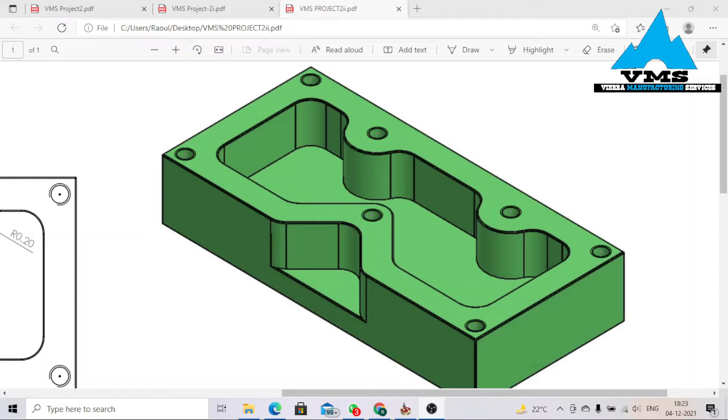Guys, in this tutorial we are going to be designing the VMS project 2. It's an exciting project. In this project we are going to be learning about many things, especially when it comes to the generation of the M and G codes. So let's get started. So let me just show you guys a drawing. Okay, so this is the final page. So we have page 1, page 2 and page 3. So let's get started.

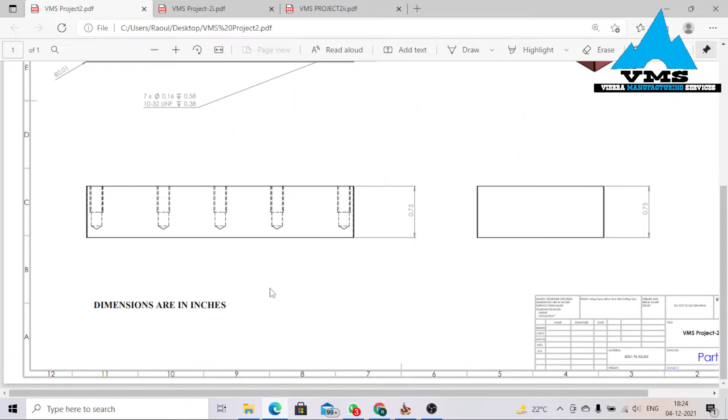Okay, let me just put this down. Let me open the software. File, new, part. Okay, good. So firstly guys, one thing to note is dimensions are in inches. Secondly, we have a rectangle of length 3.98 inch and a width of 1.88, with an extrusion of 0.75. So 3.98 and 1.88. Okay, let's get started.

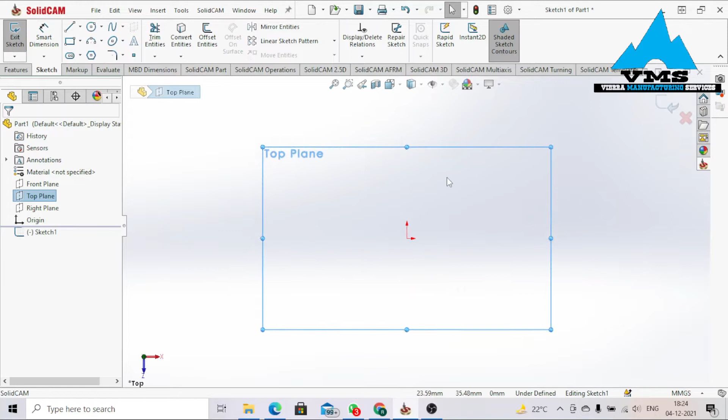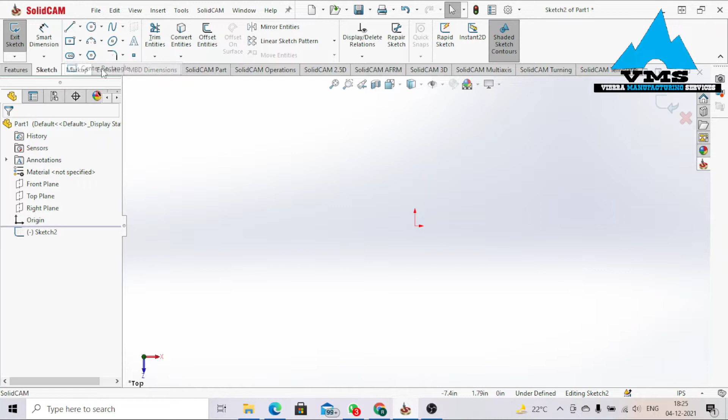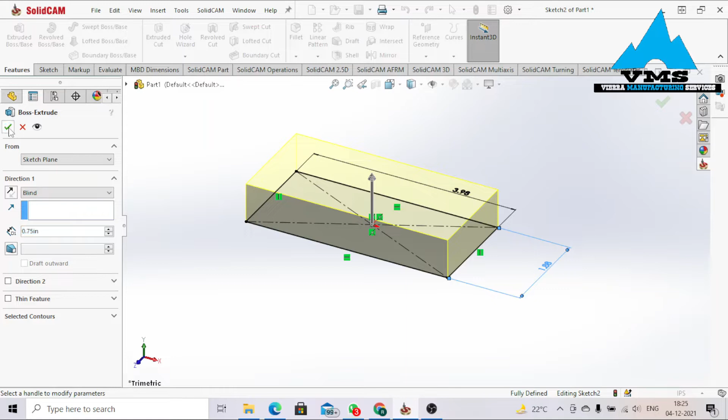Top view. Center rectangle. Smart dimension, 3.98. Oh, sorry, mistake. Always make sure to check the unit first. Unit in inches. Okay, sketch, top view, center rectangle. Smart dimension. Sorry for that mistake. 3.98, and 1.88. With an extrusion of 0.75. Okay, all good. So let's check what's next.

Looking at the drawing, we have fillets. We are going to be putting fillets later on. So let's just focus on these holes. We have about 7 holes: 1, 2, 3, 4, 5, 6, 7. It's even indicated here. From here to here, vertical. I'll put this hole, this hole, this hole, and this one, and I'm gonna make all the others.

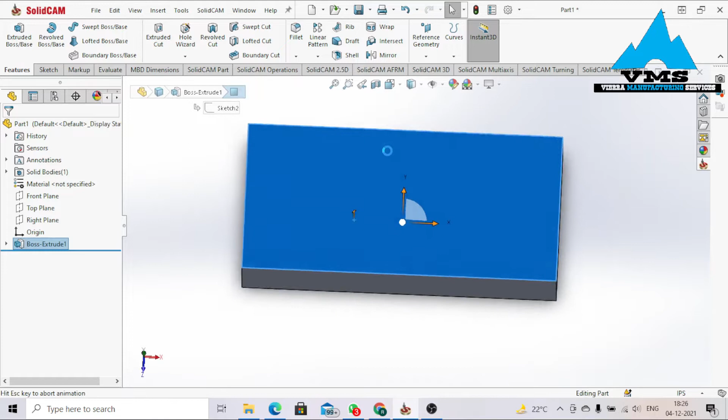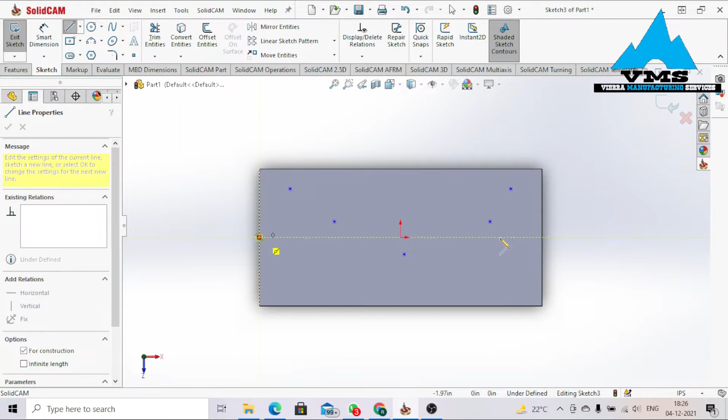Okay, sketch. Just click on point over here. Let's display some holes. Somewhere here. So let me just put center lines. Making sure, just click on this, pressing Ctrl, and then click on this. It should be horizontal. Same process. Left click on this, press Ctrl, and then left click on this. Horizontal.

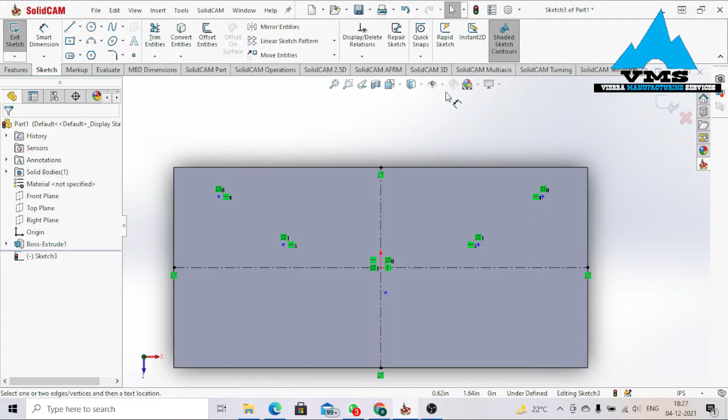Just press this, and again, hold Ctrl, click on this, and then click on this center line and make symmetry. Similar for this. Symmetry. Let's check the length. From this point to this point, we have 3.7, and its width is about 0.15. Smart dimension from here to here, 3.75.

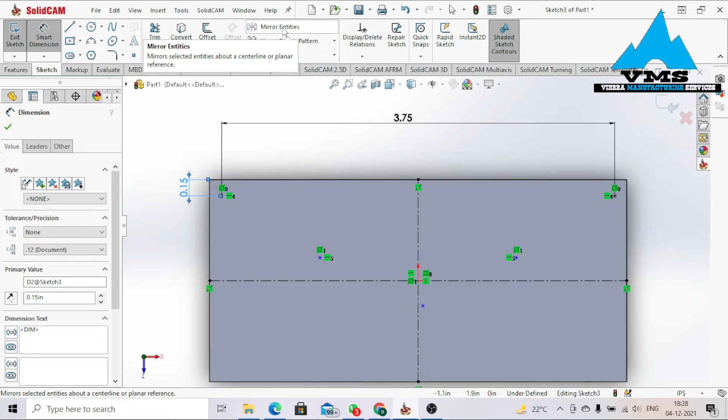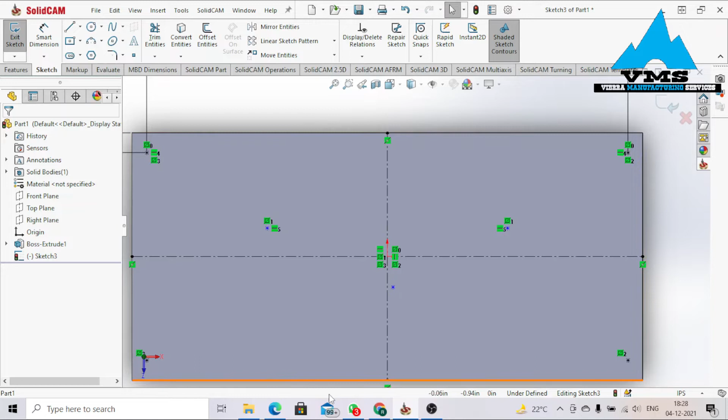One thing I'm gonna do is use mirror entity, selecting this point and this point, and mirror about the x-axis. As you notice, the sketch is not fully defined, because this and this are not defined. We need the distance from here to here. This distance is 3.7, so we have to edit it. The distance from here to here is 1.7, and its width is 0.3.

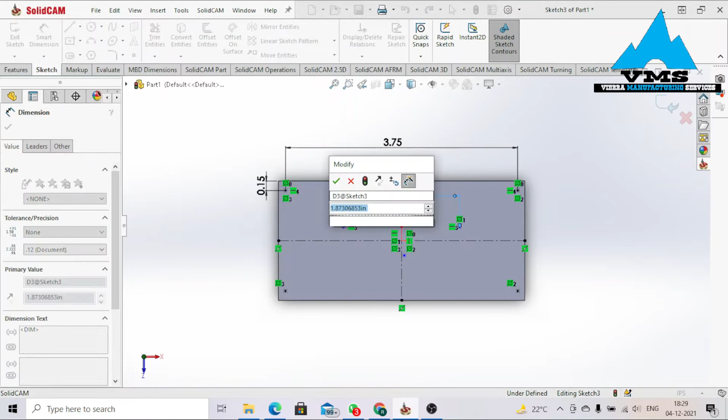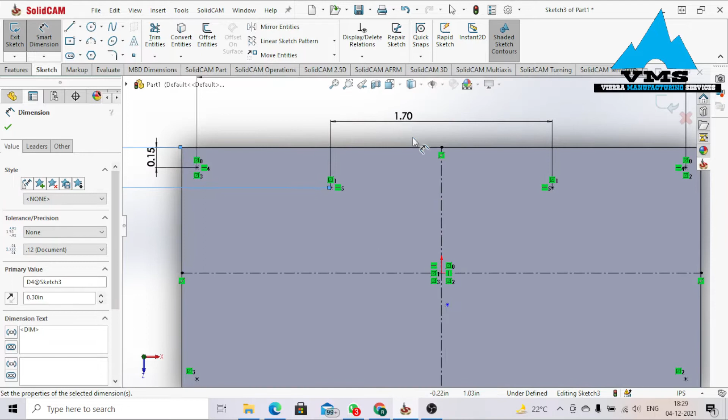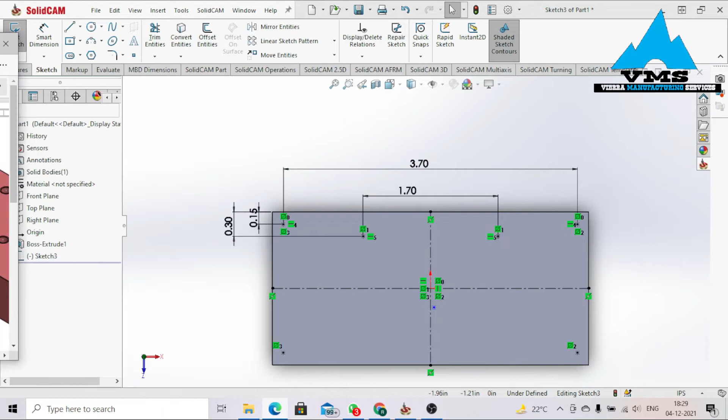Smart dimension from here to here, 1.7, and from here to here, 0.3. This point to this point, 0.3. Let me edit this. It's 3.7. All fine. Next, this point is at a distance 0.68, and from the y-axis, 2. Later we have to do a fillet at each of the edges, fillet of 0.01. Smart dimension, 0.68. From this to this edge we have 2. All good.

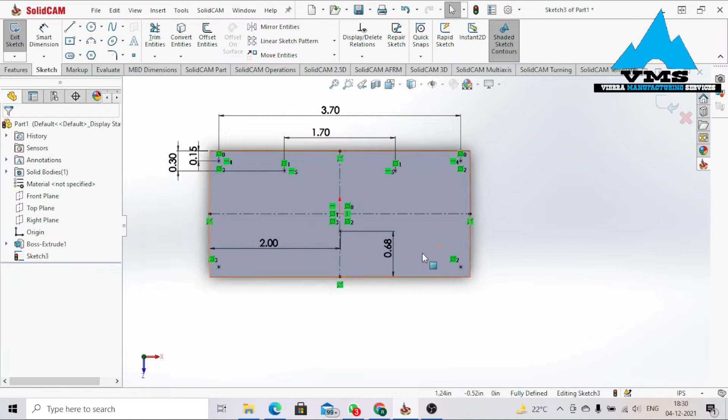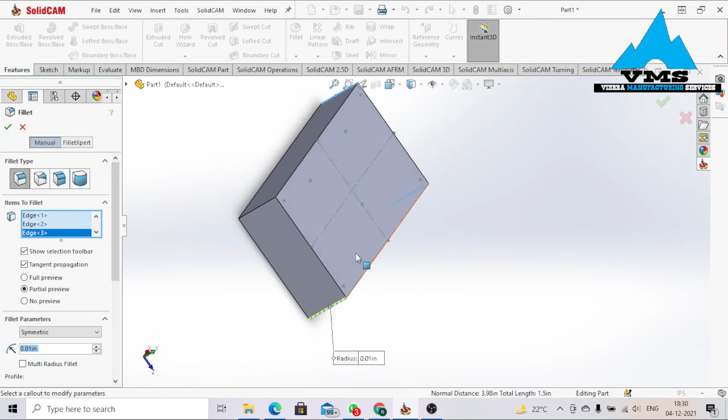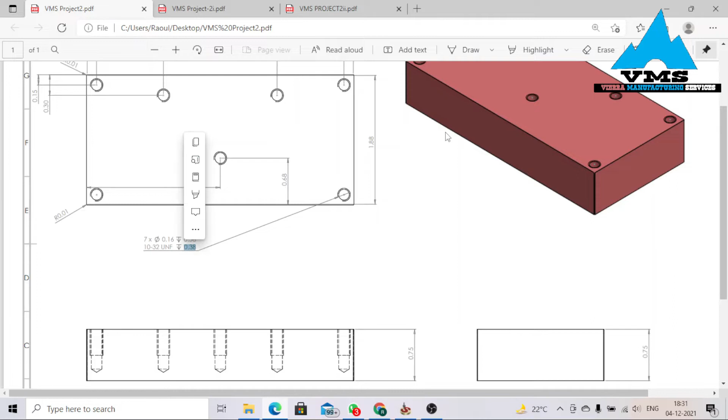Stop sketch. Let me put the fillet directly. We have a fillet of 0.01 around these edges. Make sure 4 edges are selected. Perfect. Next we go to hole wizard, but first, looking at the specification, we have 7 holes: 0.16 is the custom size, then an extrusion of 0.58, then the hole specification and the second extrusion. So hole wizard over here.

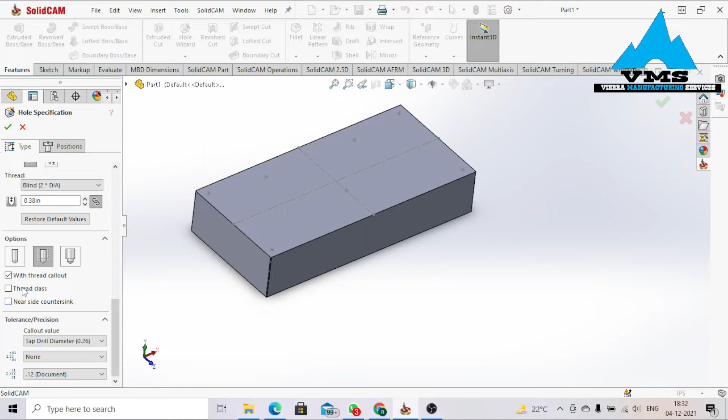Okay, the custom size over here is 0.12. Okay, fine. Blind, okay, 0.58. It appears here already because I did it before, so it's all fine. So just add the values over there, making sure thread callout is selected, and you should untick these 2. So all fine. Just go over position, 3D sketch.

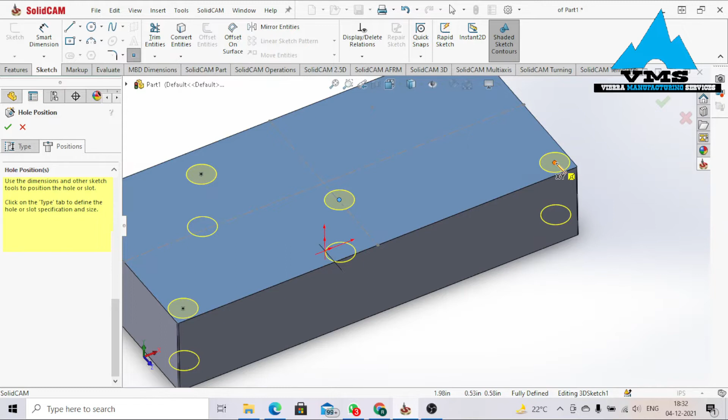Okay, this point, just select the dots. Hope I selected the right dot. Yeah, I think it's fine. Okay, good. Okay. Well, I think this. Okay. I think this is there. Good. Okay. So it's about 7. I think all fine. Okay. Cannot be. I think there's a problem.

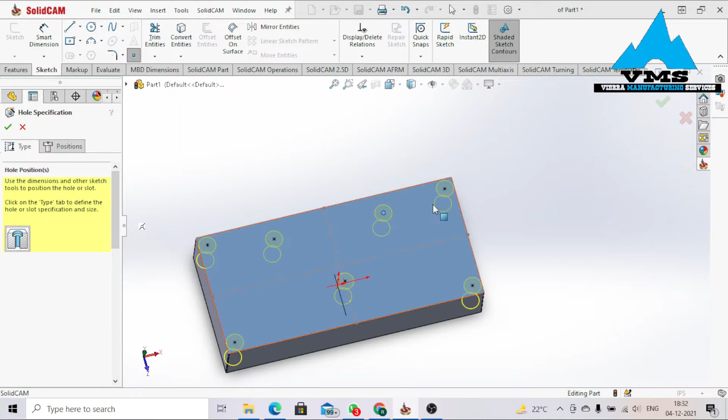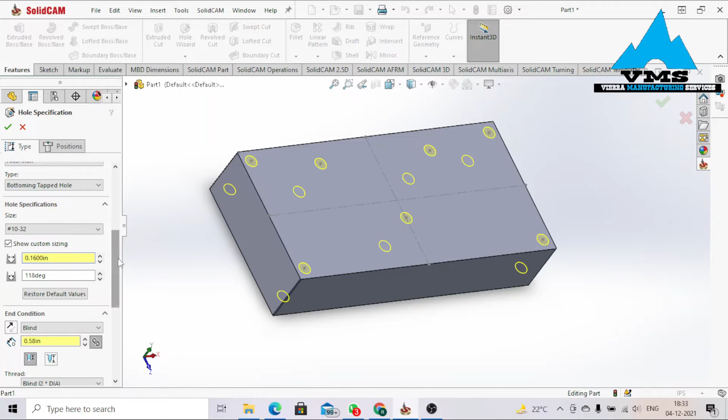Seems there's an issue here. Custom size. Okay guys, the custom size is 0.16, sorry for that mistake. That's the custom size. Okay, all fine. Yeah, I think this should be good now. Okay, just go for the okay. Okay, it's fine now. Really sorry over that mistake. Okay, just a moment. Okay, good. So I think we are done with this one. Let's just compare. Okay, yeah, it's just perfect.

So next drawing. In the next drawing, we have to produce this particular extrusion, right? So we will first of all offset the rectangle by 0.3, and then we are going to try to produce this, noting that the length from here to there is 0.54. Then we have a semicircle of radius 0.31, and equally the distance from the center point over here is 0.54. Then we are going to mirror this side over here, and then we'll look upon the down part. Okay, so let's do this first.

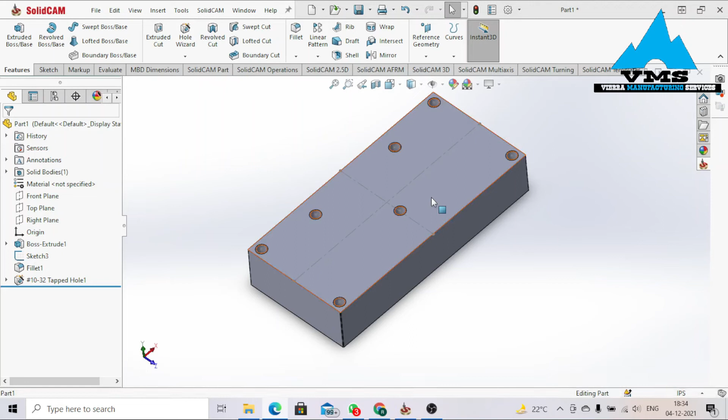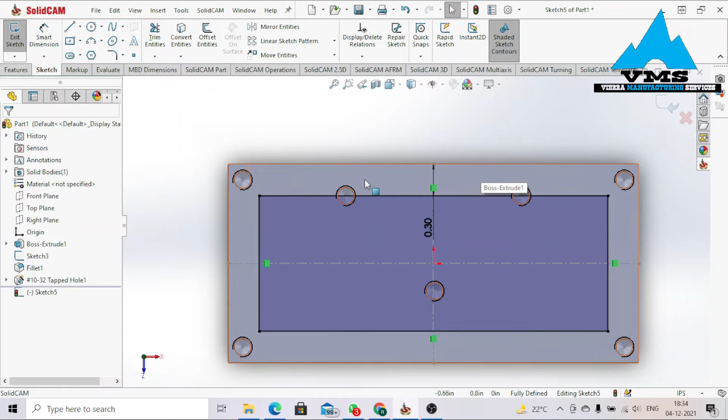Okay, so over here, sketch. Okay, offset. Just put 0.3. Okay, fine. So just try to select. Good, just select. Okay, perfect. Reverse. Okay. So one thing I'm gonna do is just select line command. Just select anywhere over there. Okay, fine. Trim. I'm gonna use trim entity. I'm gonna trim this place. Okay, good. You understand why I'm doing this later. Okay, so this is done.

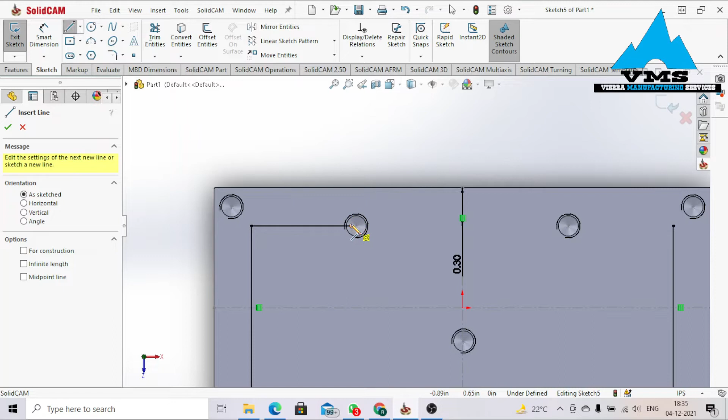So line command, select this point, go back to this point, then you notice an arc comes out. So guys, can you observe again? Line command selected, just come over this point. Actually, do not press on it, right? Yeah, just press on it. Selected, see it's selected, right? So just come back over it. As you notice, an arc is being produced, or a semicircle. So okay, then extend it up to the center line.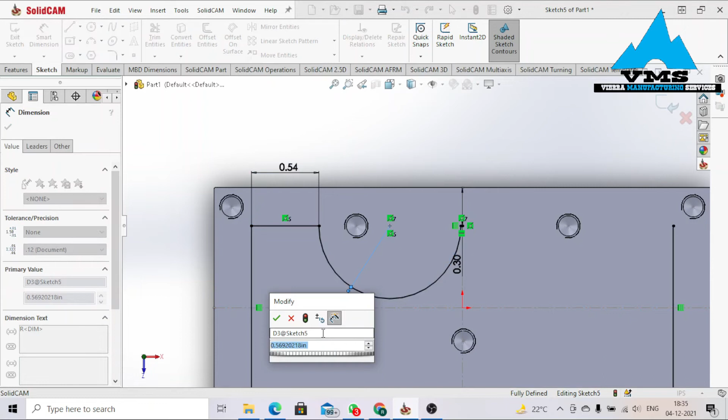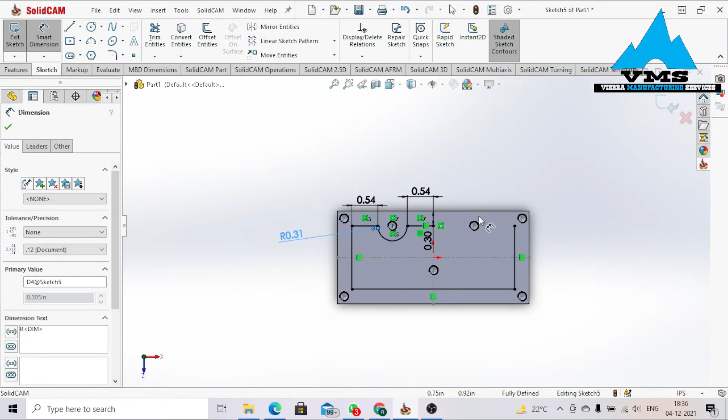Fine. Now the distance from this point, according to the diagram, is 0.54. Yeah. Okay, so this distance of this arc is 0.31. Okay, good. And now it's fully defined over here. So let me just delete this. Okay, let me define first this particular length. 4. Okay, it's fine, right? All fine. I'll just add this here. Okay. So right now, one thing I could do is just complete this.

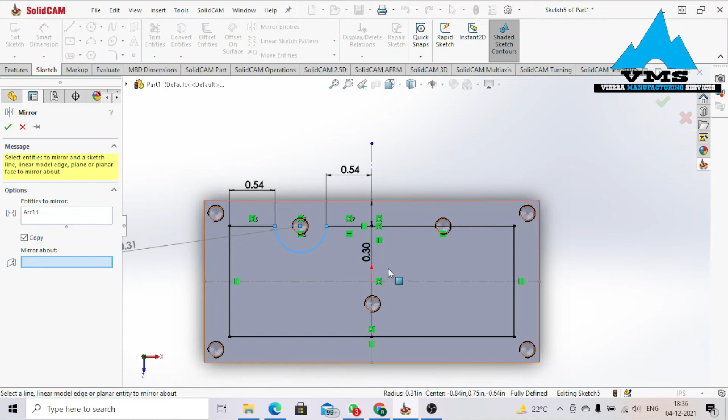Okay, mirror entity. I'm gonna mirror this. Sorry guys, center line first. Okay, construction, mirror entity. This point, mirror by y-axis, perfect. Trim entity. Okay, so one thing you could do is just trim this part. You see, when the sketch is totally blue, it means it's actually closed, right? And it's fully defined, definitely. So this curve is fully defined. So we are done with this particular place.

So what's next is this particular place. The length from this point to this point is 1.05. Then the line is inclined at 45 degrees, as you have seen. Then we have a curve of radius 0.19, and equally this line is 0.73. So let's just try this rapidly. Okay, and then it has an extrusion of 0.5 or 0.05. Okay, let's do this.

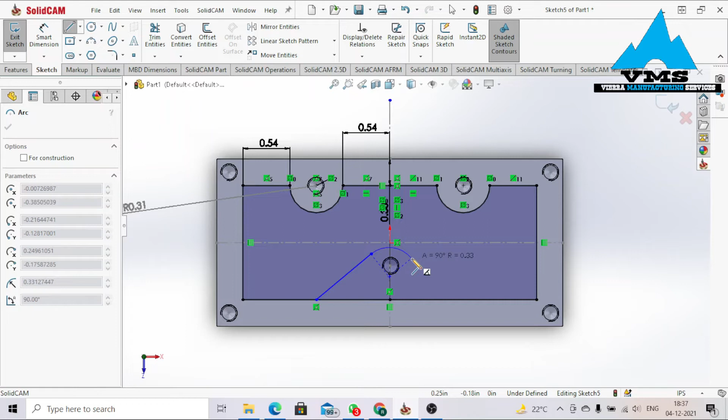Okay, so line command selected. Just select any point here, just incline it. Okay, fine. Just go, then come back, then an arc. Okay, then just click over there and then up to the edge. Okay, fine. So one thing I'm gonna do is select this point, hold control, select this particular point, and then select the center line and make symmetric. Okay, fine. Very important to do this, guys.

Next, I'm gonna define this particular line, or let's say, what can I do? Okay, one thing, trim first, guys. Trim entity, trim this portion, yes, and this portion, good. So smart dimension, so this line should be 1.05 as per the drawing. Again, select this line, and again this particular line, it should be at 45 degrees. Perfect. The length should be at 0.73, good. And this angle, oh sorry, this radius should be at 0.19.

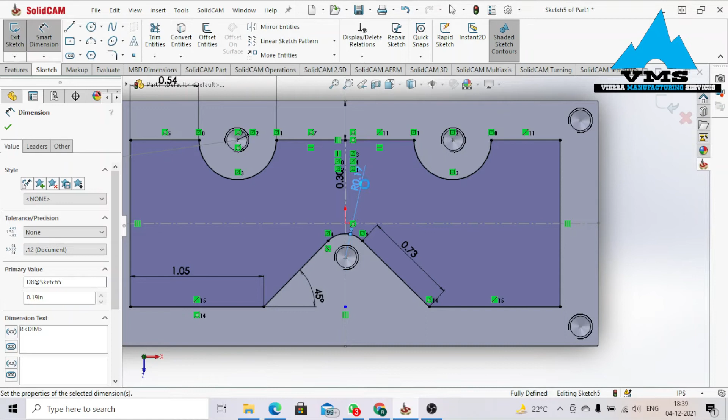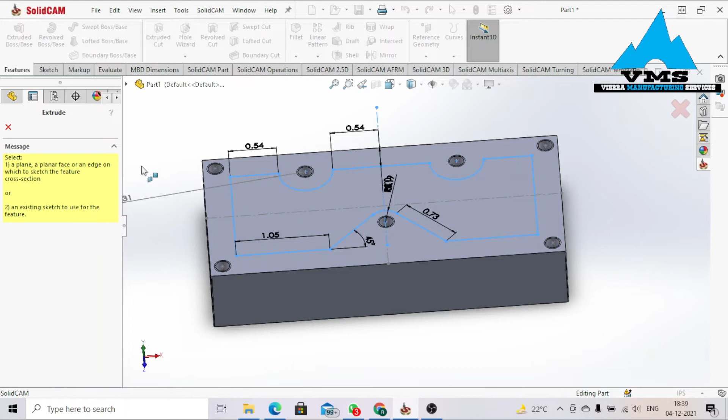Okay, perfect. It's fully defined. As you notice, it's fully defined. And it's blue, meaning that the drawing is closed. So when it's blue, it means it's properly done and it's ready for extrusion or any further process. So stop sketch. We are going to extrude it downward by 0.5. Okay, extrusion, let me just select the sketch, with sketch selected, of course. Okay, extrude cut. Okay, by 0.5.

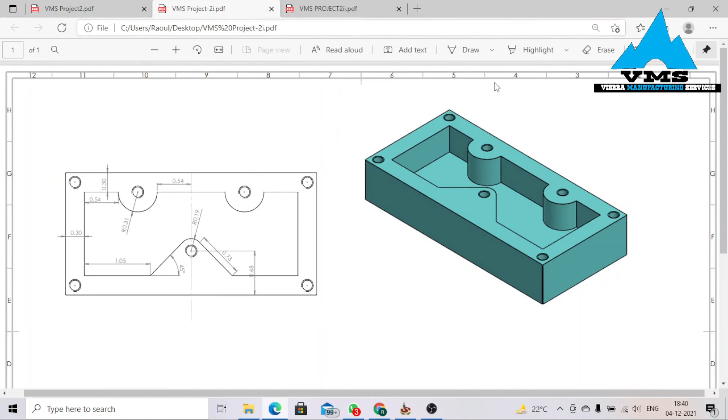Perfect. Okay, let's move on. So looking at the drawing, we are almost there. Okay, what's new? I think we are done with this drawing, guys. Let's go to the last part of the drawing. So in this portion, what we are expected to do is produce this cut.

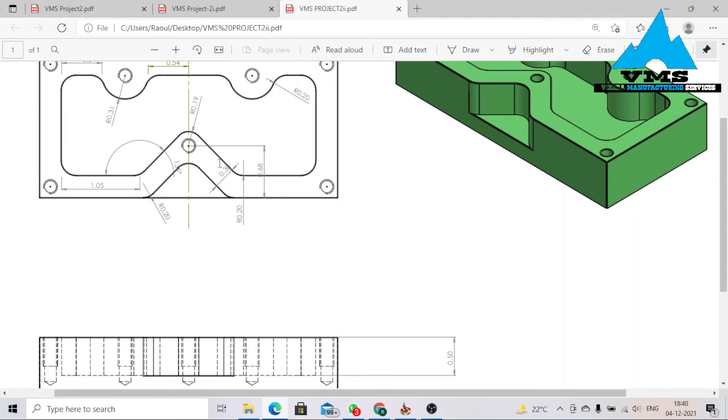So what I'm gonna do is offset it by 0.3. We just have to offset it, and then we have to extrude it again by 0.5. Later on, we have to add some fillets. Let's do this first, then we add fillets. Okay, let's look at this. So click on the surface, sketch.

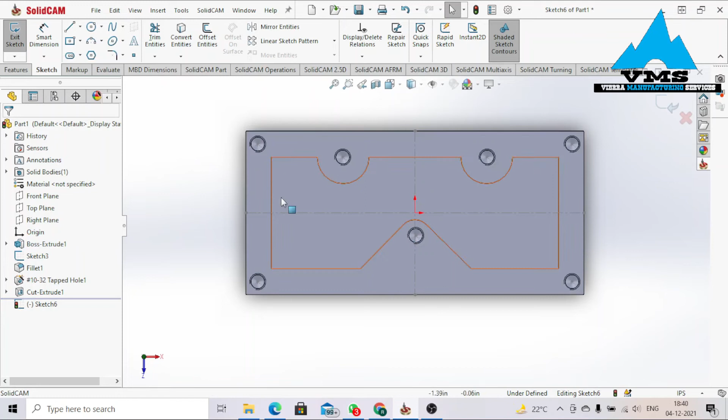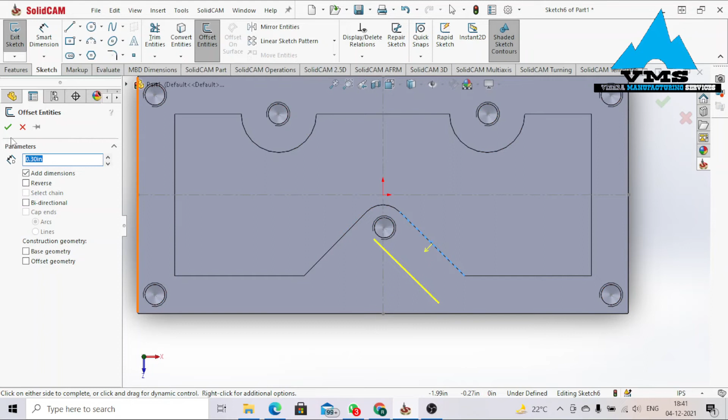Okay, offset command. Just select, it's already 0.3 selected. Select this point, let's say this point. Oh no, this point is not selecting. Okay, just repeat back the command. Let's select one by one. Repeat back offset. Okay, fine. So just click on fillet. Fillet command. Select this line and then this line.

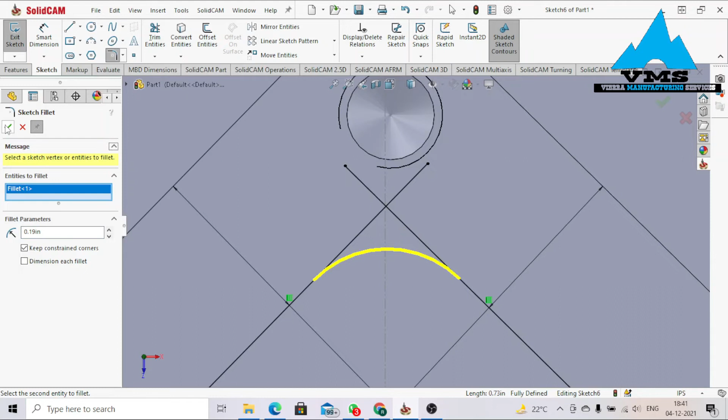You see it produces a curve or a dome, of 0.19. Okay, perfect. It's already fully defined, but as you notice, as per the diagram, it's touching this edge. So I'm gonna use the extend command. Just draw a line outside this place, any length. Good. So use extend command. You see, when I just touch it, it extends right up to this line. Perfect. So delete back this line.

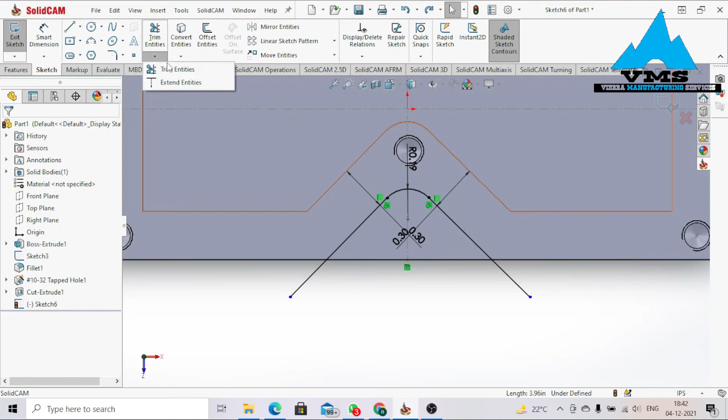Use trim entity and just trim this. Oh no. Okay. One thing, select this particular line. Come over here, convert entity. Click on convert entity. Fine. It converts the line. So now just come again. Trim entity, delete this portion and delete this portion. All fine. Okay, I think it's fine.

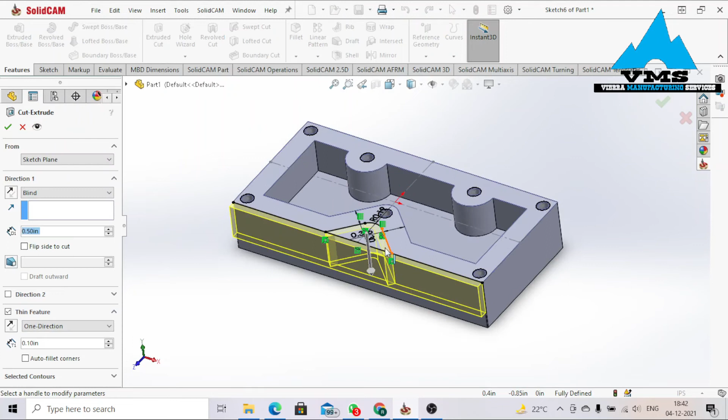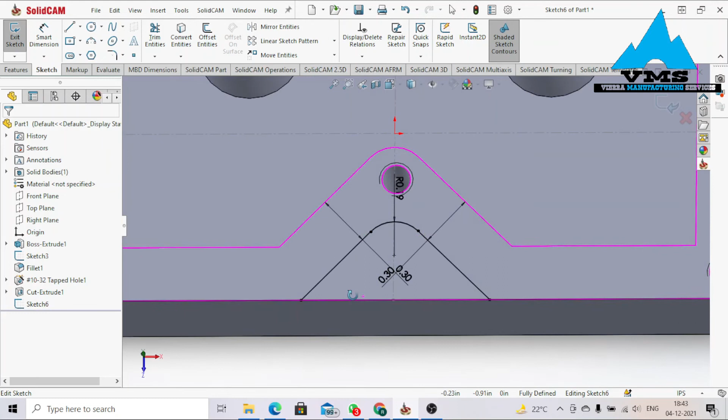Okay, so extrude cut. 0.5, good. There's an issue. We got an issue. Let's look at this. Delete. Yes. Okay. Trim entity. Trim equally this outer portion, making sure that the sketch should become blue. Okay, this trim. So it's better now. Okay, feature.

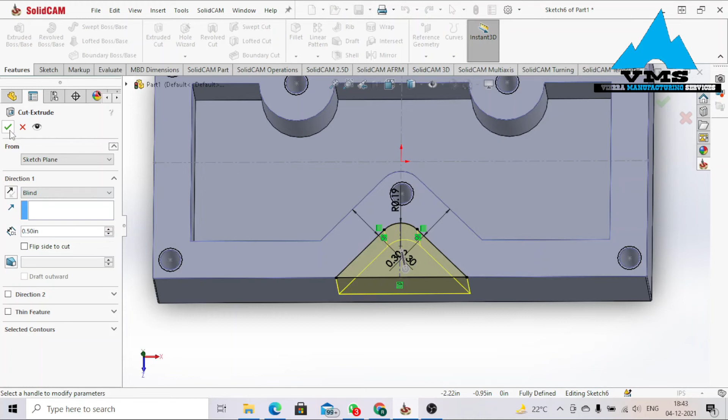Extrude cut by 0.5, good. Okay, it's just perfect. It's perfect, señorita. So we are moving on. So hide this sketch, hide, fine. Okay, we are almost done. Looking at the diagram, we got some fillets of 0.2 all around these edges. So let's put this rapidly.

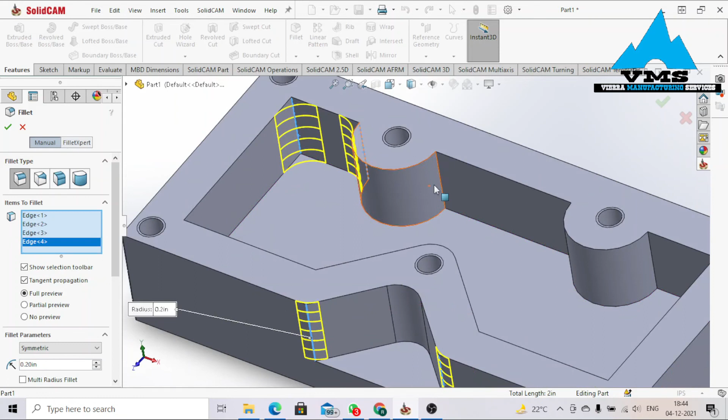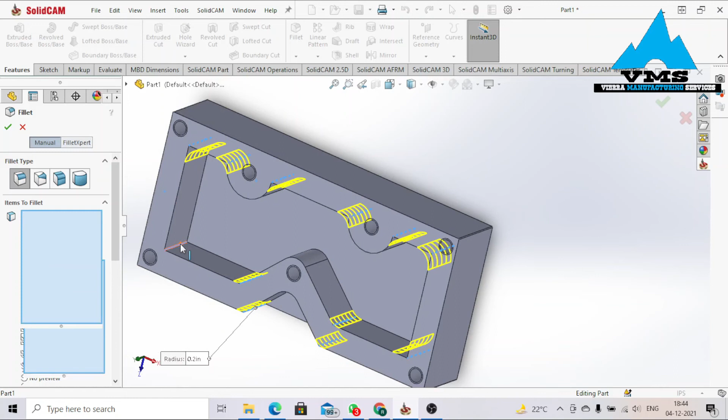Okay, fillet command. 0.2, is it 0.02 or 0.2 only? Let me just take this. 0.2, exactly 0.2. Fillet of 0.2. Let me just take full preview. Select this edge, this edge. Let's be fast, this edge. Okay, all perfect. All good. So let's look at the diagram.

Looking at the diagram, we are done, but I can see chamfers all over the surface, so we have to add surface chamfer. Just looking down here, all undefined chamfer equals 0.01 inch. So any chamfer undefined, we are going to be taking it as 0.01 inch. So let's do this. Okay, chamfer 0.01.

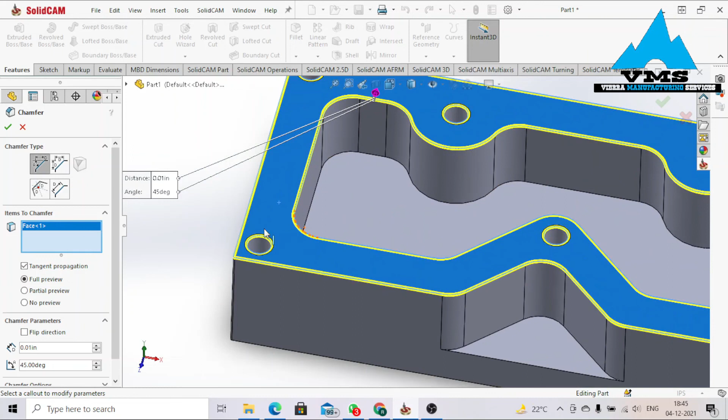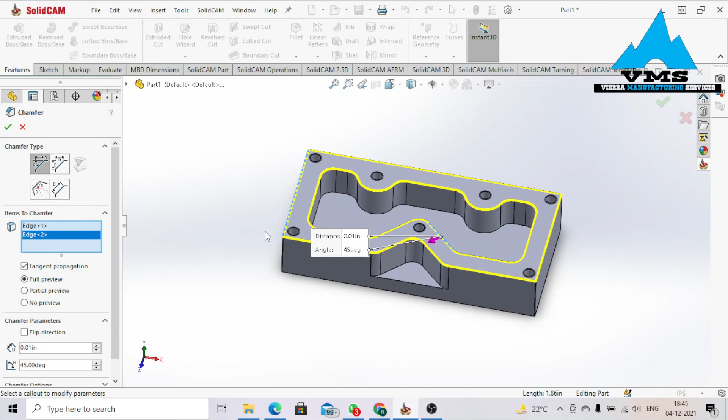As you notice, when I select the surface, unfortunately it equally selects the inner circle, which I don't want. So just unselect this rapidly. Just select these edges, all fine. Again, try to select this place. Select one after the other. All good too. So just revolve this, select this surface. Oh, perfect, just perfect. I think we are done. So let's look at the diagram.

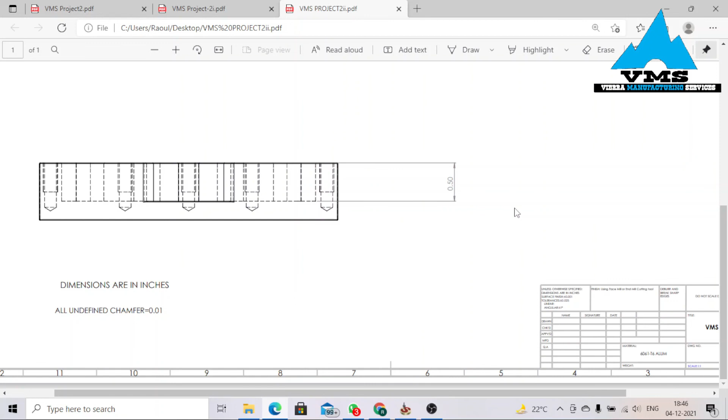Do we have a chamfer here? Let me just look at this. Yeah, there's a chamfer equally here. So let's just add this chamfer. Okay, this point, good, perfect. Okay, done. We are done, Carol. We are all done, guys. It's an exciting project.

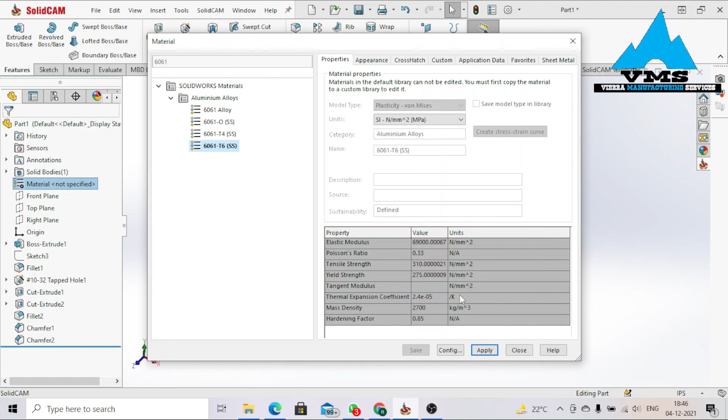One thing more, guys, we have to add the material rapidly. This is aluminium 6061, so I'm gonna add this rapidly. Material, right click, edit. So 6061 aluminium, T6, apply, close. Next thing, just select the body, appearance, body. It's kind of green, so green.

Okay, so it's fine. In the next tutorial, we are going to be speaking about the generation of the G and M code.